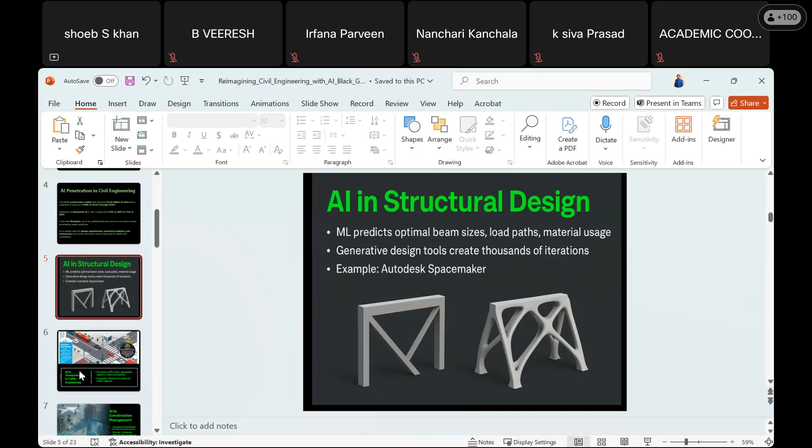Is it visible now? Is this on the same slide? Yes, sir. Okay, just let me check one second.

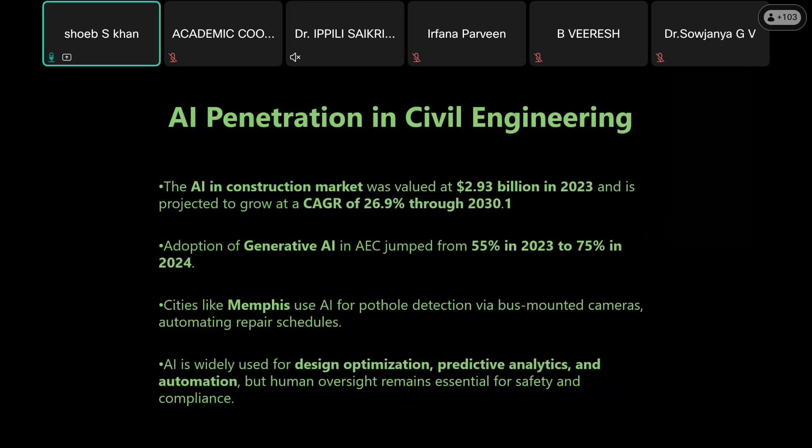And similarly, you can prevent accidents when there is any kind of motor vehicle coming from the opposite side at an uncontrollable speed. The cameras can make you aware, can warn the driver that there's something coming at a very fast speed. So these kinds of things can really help in managing accidents and everything, right?

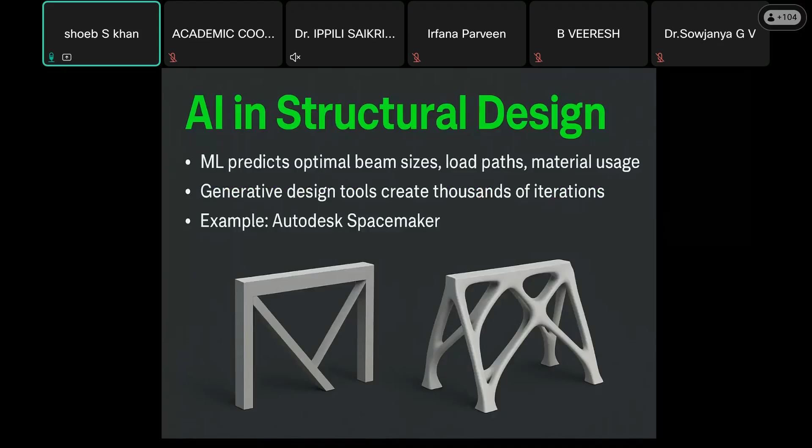As in this slide, I also talked about how civil engineering, how structural design can be helped with AI. And we'll discuss later about this software, Autodesk Spacemaker, which is helping structural design engineers to optimize the design and do the designs just by giving a natural language prompt, and we can get good results, very good results.

And the best thing is that this AI is not getting harmed by the temperatures, it is not getting exhausted while standing on the road, because our traffic officers are standing in the rains, in the sun, in very hot and humid climate. So it is very difficult for a human to monitor traffic all the time. AI doesn't need these kinds of things, it is weatherproof, humidity-proof, and it can work easily in all these conditions.

So it is a win-win situation if our countries, if our cities can implement AI-enabled systems and cameras. As we all know, Mumbai and some parts of Hyderabad are getting AI-enabled camera systems on the roads, and they are really helping in managing the traffic. So, anyone in the audience from Hyderabad or Mumbai?

No. In Chennai also they are going to implement it. I heard somewhere, I read somewhere that yes, they are going to implement it.

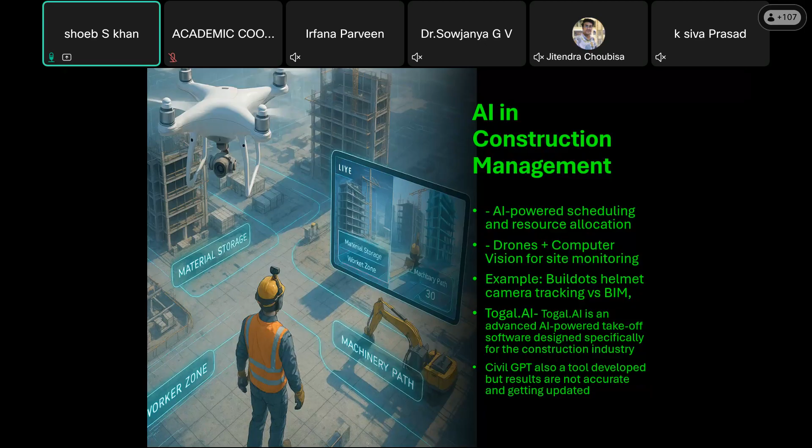All right, so this is how AI in construction management always works.

Now everybody knows about geotechnical, and geotechnical is the base of any project. Once you have the data from the soil, only then can you design your structure, and then your project can be completed. If your geotech is not correct, you will face a lot of problems. I'm saying this because I have faced this problem practically.

What happens if your geotechnical data is not correct? You are going to suffer a lot, especially in terms of designing, when you are designing something on the basis of the geotechnical investigation data. And when you go to excavation to actually start the construction work, and you get something else than what was depicted in your geotechnical report, you will get blown away.

You will just be surprised that your design was done for the soil strata, let's say for sandy soil, for gravel soil, and you are getting their hard strata. So it is a very problematic thing if your geotechnical investigation is not done very correctly.

So here again AI comes into the play. AI can really help us in geotechnical and environmental engineering, because when you are having a lot of data from a place like 100-kilometer area, everybody must be aware there is a database for everything, right from your geotechnical investigation to the type of soils. There is an institution in Nagpur, CRRI. I don't know the full form, but this is an institution which collects the data of geotechnical or soil from around India, and they are putting all the data at one place. And if they can really feed this data into the machine learning system, they can have the geotechnical investigation data done without going to the site exactly, without doing the digging and without doing any kind of testing at the site in actual, because data interpolates.

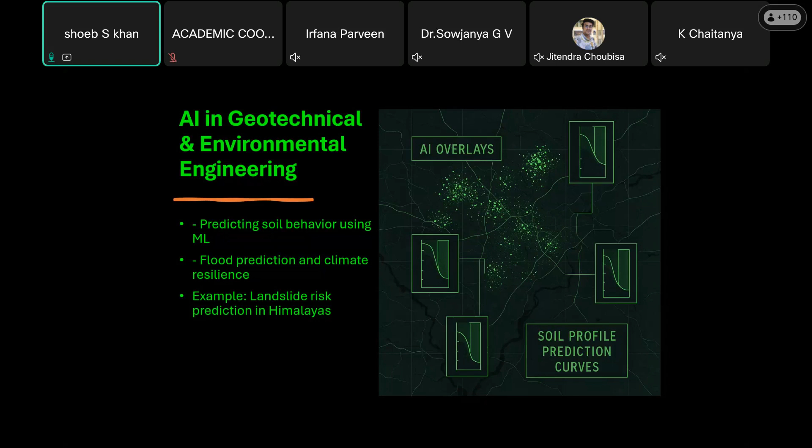So all these kind of activities can be predicted, and yes, we can take some precautions beforehand so that the loss of lives, the loss of infrastructure is very less to minimum.

Now these kind of things are there in visual inspection. As we all know, a minor crack with the passage of time can really develop into a big crack, and it can lead to the collapse of a bridge, a dam, or a tower transmission line. So these predictions can be done using AI enabled drones.

What is happening? I did one of my projects in MTech. At that time AI was not that much evolved, but we had some drone cameras, and we had a project where we had to monitor the health of a bridge which was almost 100 years old, built in Agra during the time of the Britishers. We were given this task to monitor it. There is a specialized branch in civil engineering called structural health monitoring, where you monitor the structure's health over a longer period, for structures built around 150 years old.

The industry and municipalities, your PWD departments, MORTH and bridge departments of states, are doing regular checkups of existing bridges. Recently you must have heard about the Morbi bridge, which collapsed in Gujarat's Morbi district. Structural health monitoring was done for this bridge, and the data was given to the PWD department. They were warned about the cracks and discrepancies found during the health monitoring practice, and it was ignored.

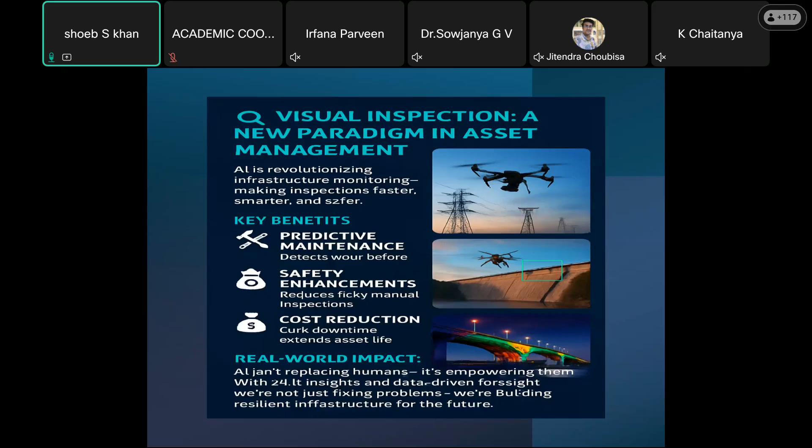In terms of research, all of us here are academicians, and we know that the evolution of technology really depends on researchers and academicians. We people are the users, the industry experts, using technologies developed in the labs and institutions, and the students working on new concepts.

And I would like to remind everybody here, how many of us have seen Three Idiots? How many of us, just let me know. Three Idiots, I think everybody from the audience has seen it.

Everybody has seen this drone shown in this movie when Mr. Lobo was preparing this drone quadcopter, and he had shown this developed device to the professor, and the professor was not that much happier to see this developed quadcopter.

Who knows that in future this technology will be used in AI in terms of getting images, real data, getting photography done, and everything is getting changed because of just drone technology. And in warfare, this drone is doing so much unexpected things. Right now we have seen it in the Ukraine-Russia war and in the Iran-Israel war.

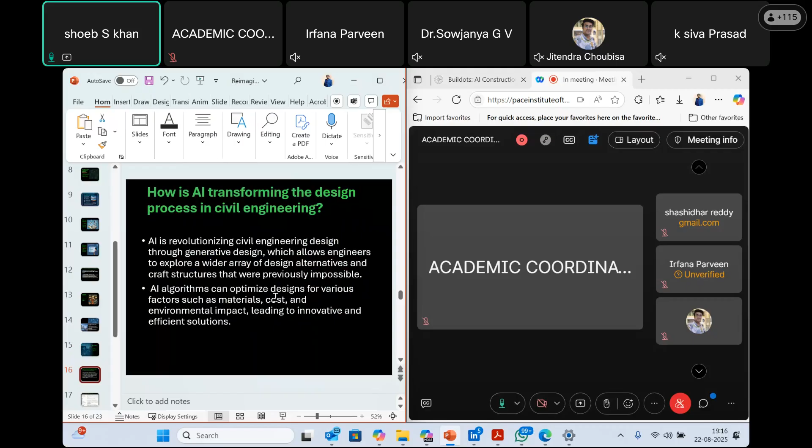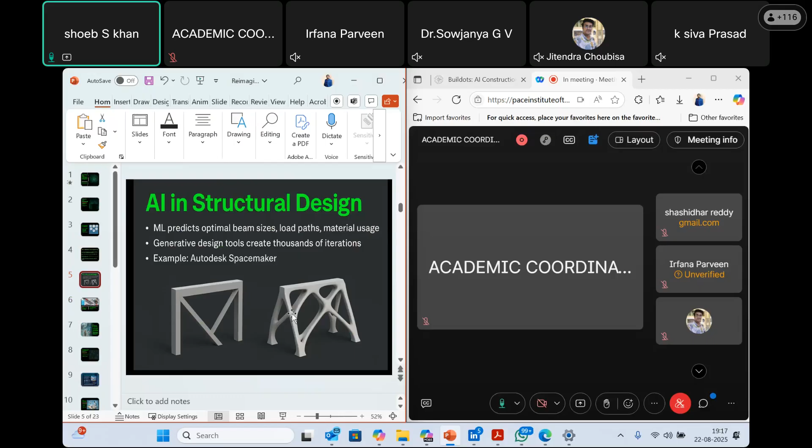So this gives us some idea that a design can also look like this, as I showed you in the earlier image, slide number 5. See how you used to think the structure can look like this, but in the right side image, the structure is totally looking different. So it is giving some aesthetic view, some extra advantage. No matter if it is going to be costly because the part is increased, this is just a starting point. In the future it will start giving good aesthetic designs as well as optimized cost ones. So this is how AI is really helping structural engineering as of now.

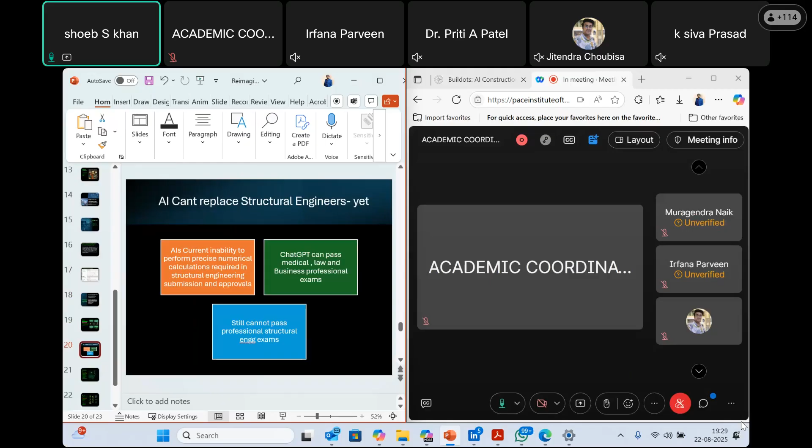Yes, it is happening. AI is teaching so many students right now in underprivileged countries like in Africa. So many programs are being run by the UN, and students are really benefiting from it.

And now the conclusion of this presentation - sir, how can we use AI in structural design, like you showed in some slide? It helps in finding sizes.

Mr. Jitendra, I would tell you, you can connect with me. I will tell you in detail how we can do this, because time is getting short and we are coming to the end of this presentation. I will let you know - we can connect after this. You can get my contact from Mr. Sai, and I will help you out with how we're doing this.

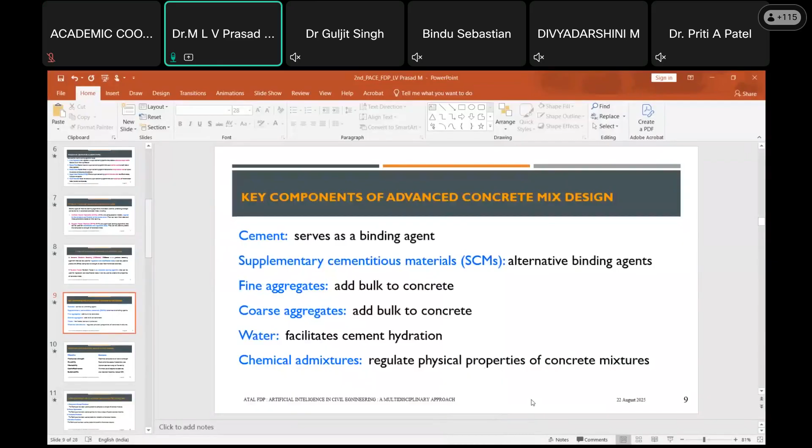So the components are the same, and objectives are also the same when coming to machine learning. But what you have to understand when going deep into this subject of artificial intelligence - as I told you, artificial intelligence, if you take it as a big circle, within that you can use ANN, or ANFIS, or machine learning, or deep learning, or even big data, whatever it may be.

As a civil engineer, when you want to develop the mix proportion for advanced concrete mixes, your target objectives will be developing mechanical strength, durability, or workability, or how to prepare a cost-effective mix proportion, or how to maintain sustainability. From the sustainability concept, instead of going for recycled aggregate, I am also saying manufactured sand or synthetic aggregates which are prepared manually. All these things in combination you can use for predicting these applications.

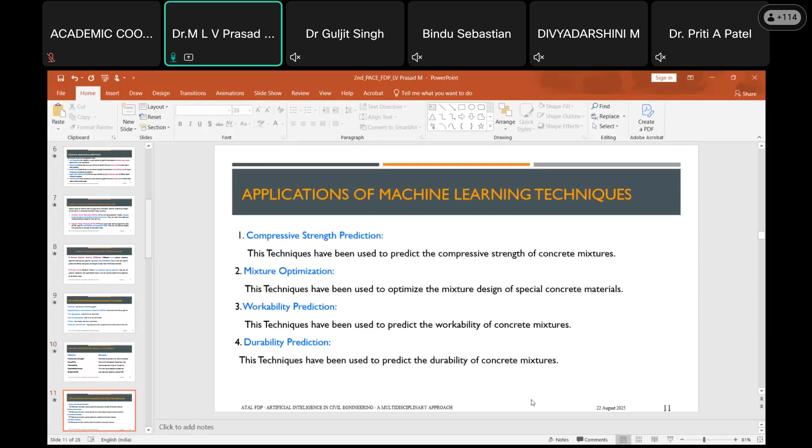Basically these are the predicting models. So what is the benefit from ANN or machine learning techniques, whatever we are going to use? Machine learning is also a concept of ANN - reverse is also possible, but I can say machine learning is part of artificial neural network. But with ANN, consider the advantage of machine learning, that activation function we already discussed. In machine learning we have 12 different types of activation functions.

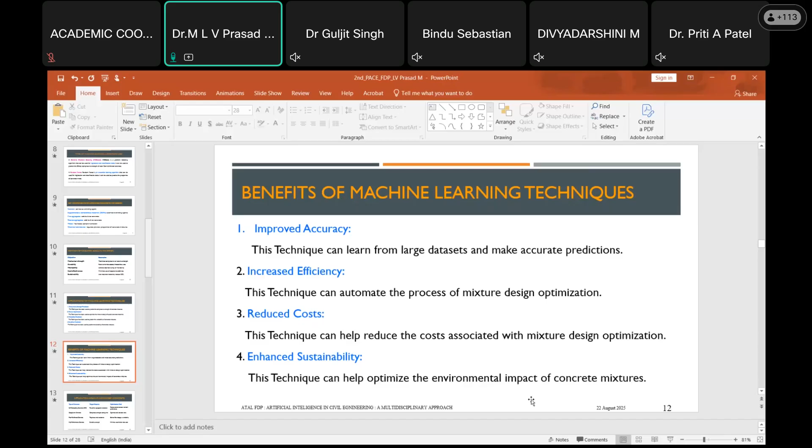When you are choosing these algorithms, you can choose any type based on your application. Generally almost 12 types of different functions are there - some of them I am going to discuss here. So like that, when you want to go deeper, you can go to deep learning also, or sometimes we can use big data based on your requirement.

These application areas we have discussed in the last seminar also, like the type of concrete. Based on the type of concrete, your target will be different and your optimization goal will be different. If I want to develop self-compacting concrete, I should concentrate on flowability, passing ability, segregation resistance, and I will try to reduce the cement content, because here it will be in the form of a powder, not in the form of cement.

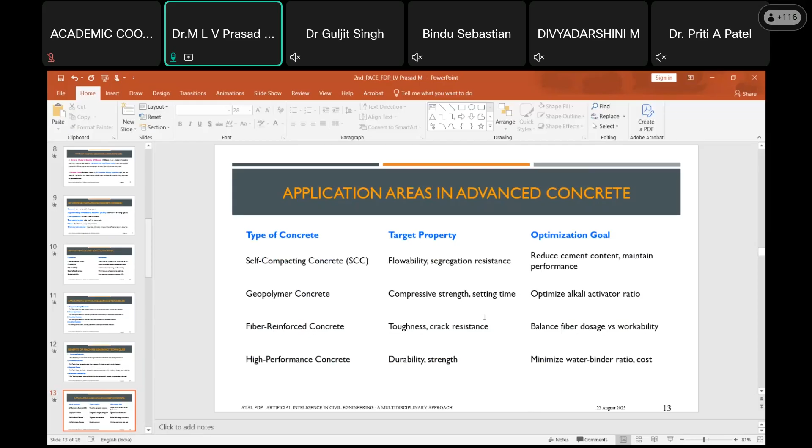I want some binder, and with the limitation of cement content I can reduce the cement, but similarly I have to maintain the performance also. Suppose if I want to combine these three - let us say self-compacting geopolymer concrete, geopolymer fiber reinforced concrete - I can develop that, but it should have all these properties. And obviously, when I am going to this big goal, all these optimizations I have to do. So this machine learning will help you to prepare such type of concrete also.

The concrete what you are developing - self-compacting geopolymer concrete, geopolymer fiber reinforced concrete - you can develop that also with no need to do regular experimentation. Simply with the available data, you collect the self-compacting concrete data, the geopolymer concrete data, the fibers data, and if you are using manufactured aggregates or human-developed synthetic aggregates, you collect that data too. With this combination of inputs, you train the ANN, choosing the algorithm in such a way that it gets trained and accuracy increases, then you get the results.

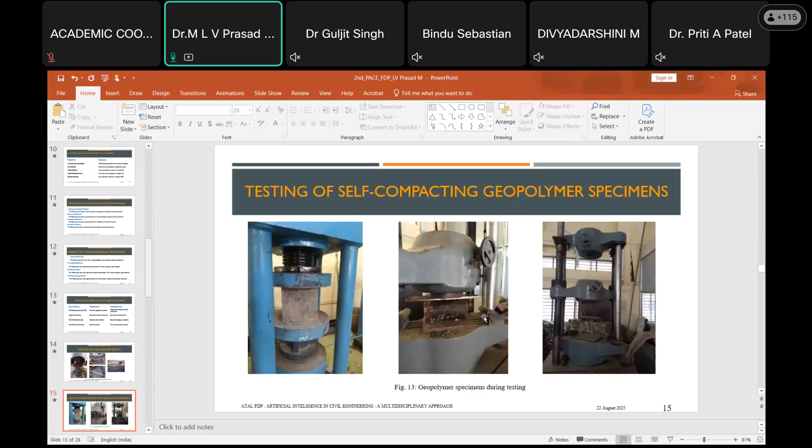So what are the input parameters we will use in this machine learning? Obviously cement content we have to give, water cement ratio we have to give - here our target is strength and durability. In the previous section we concentrated on only one output. Here you can increase the number of outputs to more than one - it may be two, it may be three, like that.

One example I will show you where I have given three outputs like compressive strength, tensile strength, flexural strength. Even instead of keeping only these strengths, you can give some flow parameters also as output, like checking - since I am saying self-compacting concrete now - what is its flowability, what is its L-box value, what is its passing ability, what is its segregation resistance, whether it is satisfying the specifications or not. These are some examples you can give as input parameters. Always you have to fix the number of input parameters - it may be 5, it may be 10, it may be 9.

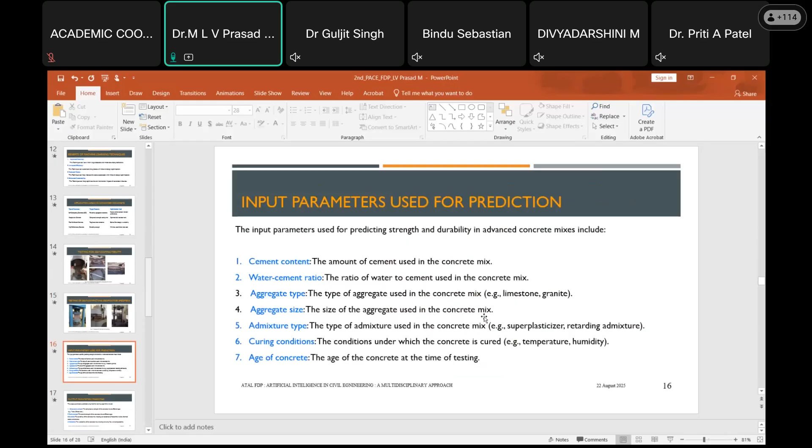Based on the number of input parameters, the number of hidden layers goes on increasing in this machine learning. That is the only difference. But because the algorithm is running using some software, you are not doing it manually. So the combinations it will take, if the number of inputs are increasing and the number of hidden layers are increasing, it will see the different combinations.

Let us say, suppose I am saying: a 20 MPa self-compacting geopolymer fiber reinforced concrete developed with synthetic aggregates. Just one sentence, but here if you see the combinations, I have to see all the self-compacting properties, whether satisfying or not. Then I have to see what is the best combination of alkaline solution and binder, with what alkaline solution to binder ratio, and what molarity I will get the self-compacting geopolymer concrete.

Again, what is the optimum replacement of the aggregates? Either I have to go for 100% replacement, or do trials with one mix proportion with only 80% replacement of the natural aggregate and 20% replacement. What will be the trial? Like that, you have to train, you have to give the training first.

Then again, when I am coming to the fiber, what type of fiber? Because we have different types of fibers, again in that fiber, what is the percentage of dosage? You can hear starting from the optimum dosage to lower dosage. You can give maximum and minimum values, so that it will be trained in such a way that finally when you do any combination, it already has practice. Like that, we have to improve the combinations and the output.

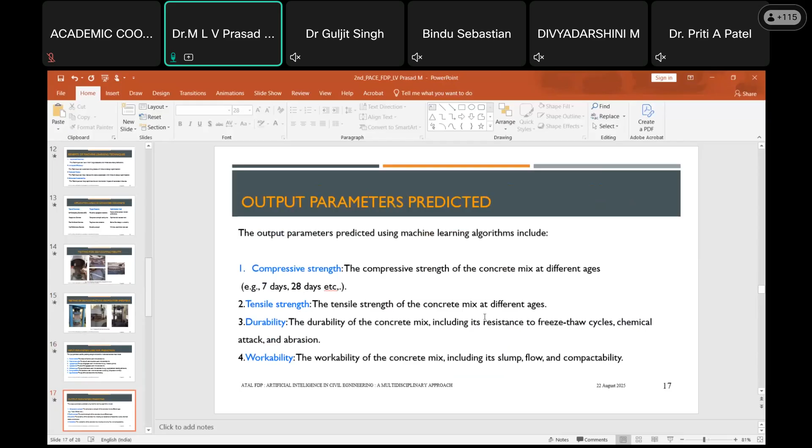So here it may be compressive strength, it may be tensile strength, or it may be durability, or it may be workability. Any of these will be your output parameter. So here, basically, what I am going to take is one best example, from my student's PhD scholar work. Initially we tried to do with a single output, but this...

RELU function, this is called rectified linear unit function. This is also one of the functions I told you now, there are separate different functions available. So here I am going to use this deep neural network. It is a deep neural network with a rectified linear unit activation function. This is a deep learning ANN developed in TensorFlow. When I am using TensorFlow, the model architecture is a deep learning ANN developed in TensorFlow.

So my objective is to determine how various input parameters affect the compressive strength, flexural strength, and tensile strength of the self-compacting geopolymer concrete, like that. And the activation function, already told you, is rectified linear unit. We have 12 different types, but I have taken this RELU function because I have that software with us, which has that function.

Simply, I am going to put these input values into this software, and I am going to get the output. So here input, actually we have given 9 different parameters. When it comes to the binder, we have given ground GGBS, we have given fly ash, we have given sodium hydroxide, we have given sodium silicate, we have given the age of the specimen also.

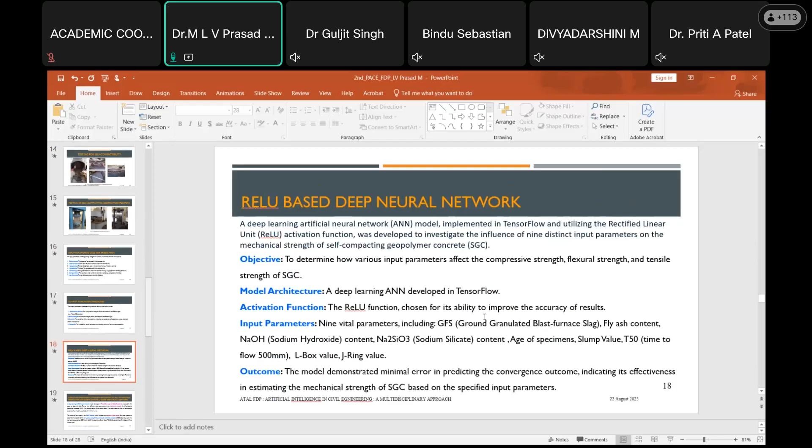Effectively, it is going to give the results. Once again, I am going to show this case study: mechanical strength estimation of self-compacting geopolymer concrete using ReLU-based deep neural network.

So I am using the deep neural network, the TensorFlow based one. The model is developed using TensorFlow, and here I have taken 9 different parameters. You can take more than that also. When you say accuracy wise, it is going to give very good accurate results.

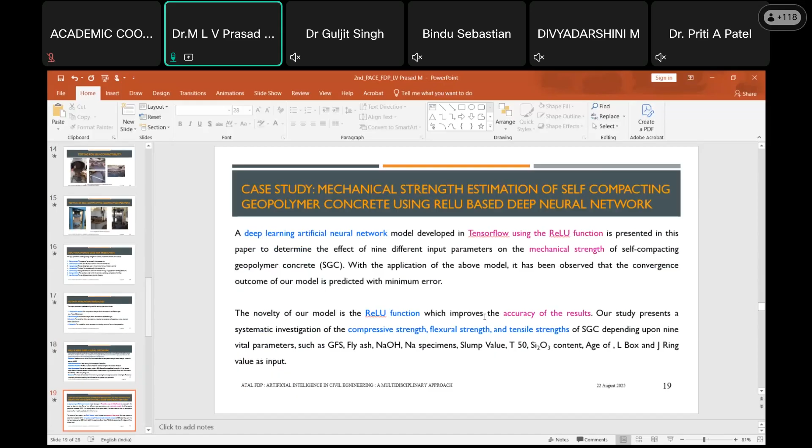And the total database of 396 samples are collected, all from the literature only. No need to do rigorous work yourself. Simply collect different data related to self-compacting concrete, geopolymer concrete, fiber reinforced concrete if you want to keep. But here I have taken only self-compacting geopolymer concrete. So 132 distinct mixes are collected.

From them, again I have to write the mean, maximum, minimum, standard deviation and all those values. The procedure is similar to what we previously did in ANN. Only the activation function inside this is going to be different.

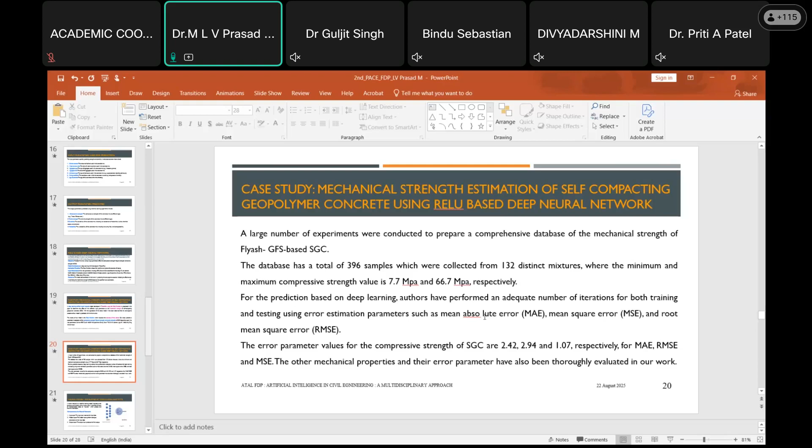This activation function introduces non-linearity, enabling the network to learn complex patterns in data. What is the activation function? It introduces non-linearity, because when I am saying fiber reinforced self-compacting geopolymer concrete, I should have the concept of non-linearity also when coming to the stress-strain behavior. So when saying about concrete, this non-linearity concept also we have to see, and with that only we are going to do here.

So if I take a simple neural network, it is going to be like that. You are going to have some input values. Suppose if I want to define u and v, individually they are connected. Weighted average, you know now how to take the weighted average. Even sometimes, to get more accuracy from a combination of two values, you are going to take the weighted average of it, just like calculating your mean.

Suppose if you have an irregular shape, say an I-section, and I want to know its CG. How do you do it? A1 x1 plus A2 x2 plus A3 x3, divided by A1 plus A2 plus A3. That is the simple technique I am saying. Similarly, we are going to take the weighted average to define this neural network. So simple neural network, weighted average we will take here.

And you are going to have the hidden layers. What are the components of a neural network, I am going to say here. Hidden layers perform complex calculations on the input data. In the hidden layer itself, you are going to choose different functions. It will try different combinations of functions to give accurate and suitable results, because for mixed design proportion and mixed development, the function that is suitable may not be suitable for developing something else.

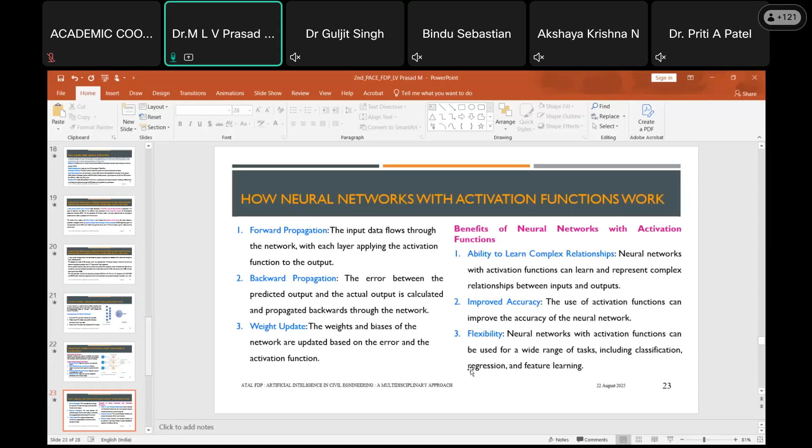Already I told you, I want self-compacting geopolymer with some fiber or with some synthetic aggregate - so complex relationships like that, you can also predict. Improved accuracy and flexibility - these are the advantages of this activation function with respect to neural network.

So here, the input - already I told you we have given 9 input values, and for those 9 input values, already I told you how many number of different data we have collected. And for that we have written the ReLU algorithm, and finally our range is 0 to 485, 0 to 485.

Some slump values, minimum I am taking more than 650, and maximum it may be 700, 800 also. Then those who are working in the self-compacting concrete direction, we have to calculate the horizontal flow, then L-box value, J-ring value - all these things, because only if it satisfies these maximum minimum values do we say it is a self-compacting concrete.

Here you see the maximum is almost from 65 to 70 MPa compressive strength. Then tensile strength is 10% of this, and flexural strength is 0.7 root FCK, like that. So almost all these values, you are going to get output as 3 different values, not a single value. One best example I am showing only for the compressive strength.

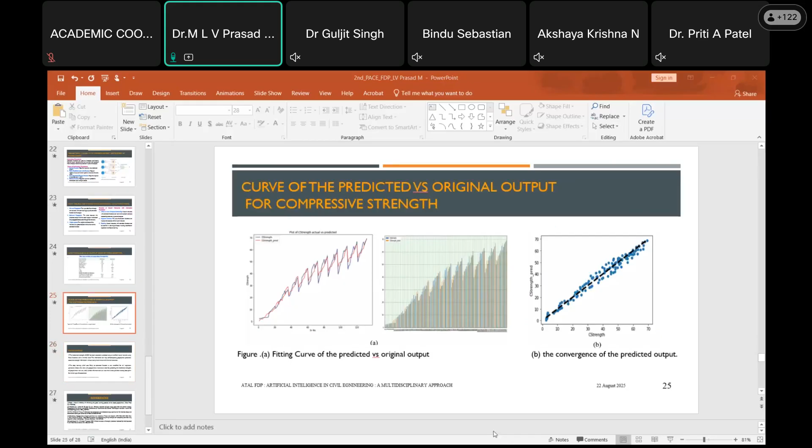So this is the paper which is published under Taylor and Francis. It is also a Q1 ranking journal, Advances in Materials and Processing Technologies. It was recently published in 2023.

It is very simple. We have taken this ReLU based function and used that software. Already I told you, suppose some people working don't want only one output, they want a number of outputs, then obviously you go for deep learning artificial neural network. It is machine learning based only, but it is deep learning. Even nowadays we have big data based concepts too. So here I have used a deep learning machine learning algorithm to predict these values.

Already I told you we have taken different mixes, 396 samples collected, all from the literature only. All these samples I have collected, I have given in the reference, 35 papers. So from these 35 papers I have collected different samples with different combinations of geopolymer, self-compacting, GGBS, fly ash based and all that. With 9 input values, I am going to get results of 3 different outputs. Even you can keep more than that also.

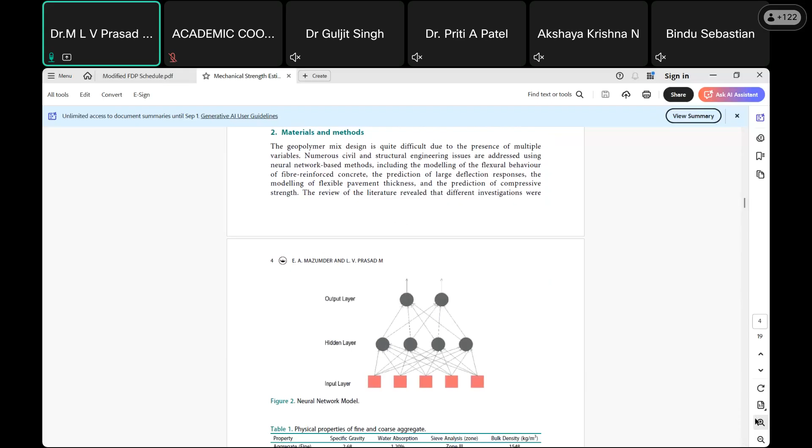That is the basic advancement, what I can say, from artificial intelligence to ANFIS, and ANFIS to machine learning, and machine learning to deep learning.

So whatever it may be, you have to know how to utilize this latest technology. You think as a civil engineer we don't want much knowledge in artificial intelligence, no need to. Some people feel they have to learn so much programming to utilize this artificial intelligence and all that, but it is not like that. You understand the basic concept, and you see.

Suppose, let us say all of us are using this, STAAD programming. But how many of you know that coding, the background coding? No one knows. Earlier, when it was in STAAD III, when you had to give the input, at that time only we would write individually, writing the input, then we would get the output when using STAAD III.

But when STAAD Pro came into picture, no need to write the coding also. Simply you take the nodes, then connect the members. So no one is going to think about what is the background of it. You just have to know how to use that software.

Even AutoCAD, you are not going to see what is the background of it. Even if you go to MATLAB or Python, you are writing the coding. But if you come to the latest Java based or Visual Basic based software, we are not bothering what code is going to be in the background. Best example is this ChatGPT.

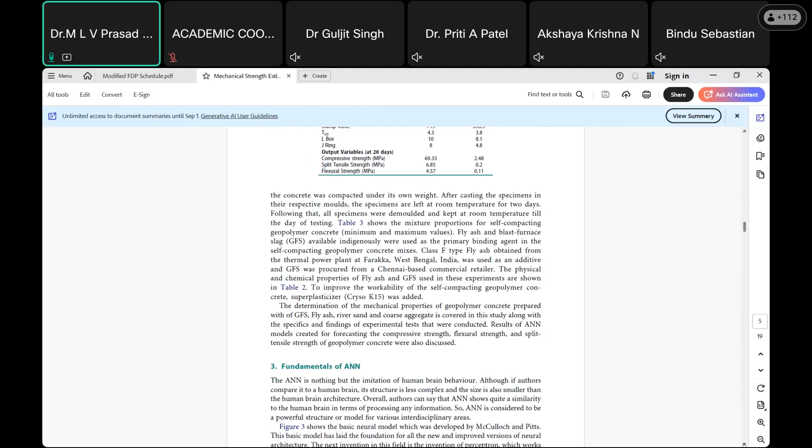So fundamentals of ANN also you have to know something about. If you check the basic development, Pitts and McCulloch, they developed these fundamental things of human ANN actually. So you have to go through their papers and what they said about this ANN, and you should have the basic knowledge about this.

Then, simply what is developed and how it is utilized in deep learning. In deep learning, with the utilization of activation functions, how accuracy is improved by increasing the number of hidden layers and activation functions, and how this neural network is still modified—all these things are available. So you go through this. If you people are interested, I will share this.

And you have to know the background study of this multi-layer perceptron. Obviously I have to go for multi-layer if the number of input parameters is increasing. Just like when you are using your laptop, if you are simply using AutoCAD only, then even the RAM or memory or speed of the system you have regularly, it is okay.

But suppose you are storing additional software like Abaqus or MATLAB on your laptop, then so much storage it will take from your system, and so much speed is also required, because so many internal algorithms are going to run inside of it. So much speed, so much memory is required. So, like that, here also multiple layer perceptron is required.

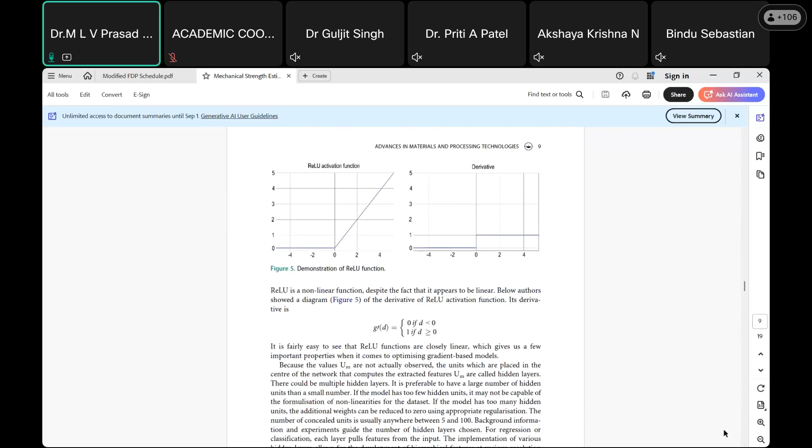So that's why you have to learn all these basic concepts. I already showed you a demonstration of the ReLU function. We have different functions like this. Here what we have taken is from 0 to 1, but even with negative values you can do it. So you can choose the limitation - either 0 to 1, or 1 to negative, or -1 to +1. You can keep any weighted values based on the type of function you are using.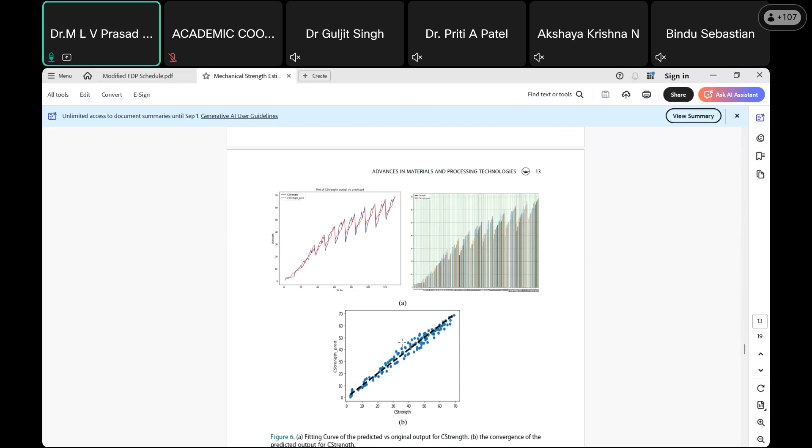So here you can see these results I am getting directly from the software, and I am going to compare these with experimental results too. I already have results from someone who has done the work, and you can even cast and get experimental results yourself, then compare them with the predicted results. Almost, if you see with this black line, they are very near to this - so you can predict more than one value in this.

So basically what I want to say is, no need to worry about how to learn this, because when you are coming to the PhD stage, you are almost around 30-35 years old. At that time, if you want to learn new software, you are also going to have your personal responsibilities, and even working in some institute brings other responsibilities too.

So as a youngster, like a BTech or MTech student, the advantage they have is that once they see the beauty of learning this ANN, ANFIS, deep learning, machine learning, or big data, once you are familiarized with this, you will not leave it - your interest only keeps increasing.

See, now my age is 48 years. At this age also I am able to learn this, with the help of the youngsters only. Frankly speaking, I am learning from my students. I am not training them - initially I tell them what is the requirement, I give them the problem only, but they actually get the solution. Because once you create interest in the students, they will go into depth.